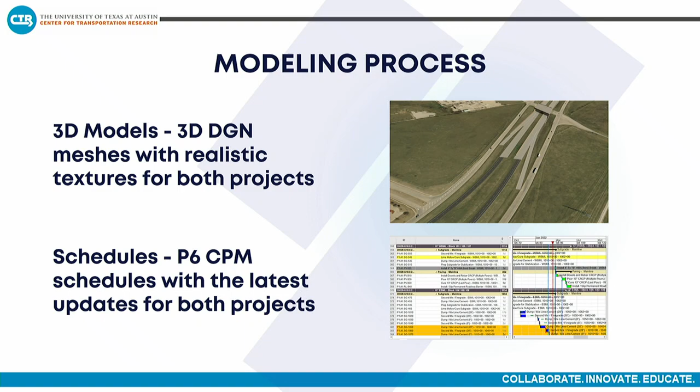Now the modeling process: first we obtain a 3D model, getting horizontal, vertical, and cross sections from the design team, and then we added the texture in 3ds Max.

Then we proceed with the so-called resource generation. That's a way to organize the 3D objects that are imported in order to generate groups that will be assigned to different tasks in the next step.

So for the schedule import, we imported from P6, and we set the scenarios because we obtained two different schedules that belong to two different updates. And we perform the task assignment, that is the match between the 3D objects that belong to the resource and the actual activities.

And then for the 4D modeling, we perform a little bit of animation in just a piece of equipment and some parts of the project, like objects, beams, slabs, in order to show a construction sequence. I'm going to show a video about that next.

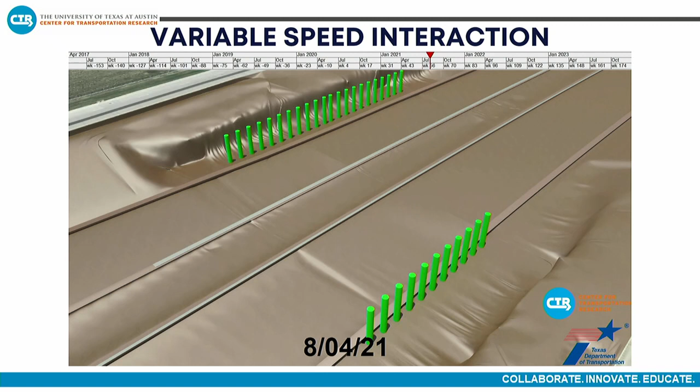So this is the first animation we obtained. That's a variable speed interaction that allows us to watch the construction sequence. It includes a detailed bridge construction sequence. We use different speed animations in order to show detailed activities such as beam placement, retaining walls, bridge construction, and also road construction.

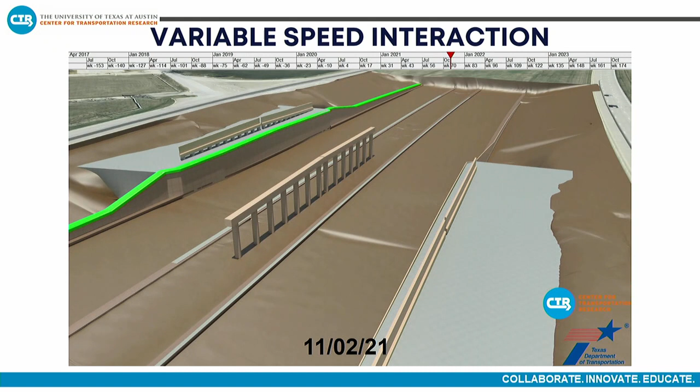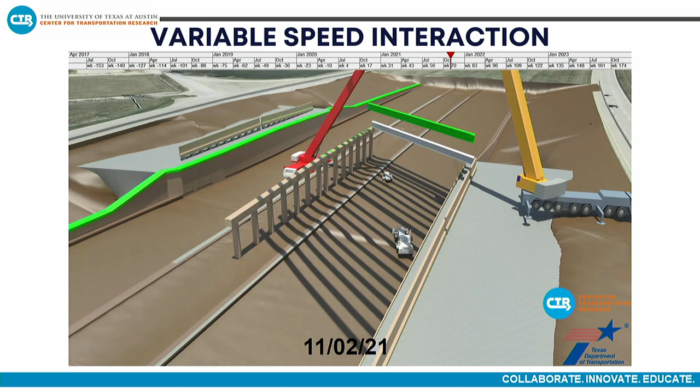All those components have detailed textures and added surroundings. So we were able to add some filling material behind the retaining walls, and also we were able to animate cranes and show a little bit of detailed construction in the middle of a big project construction.

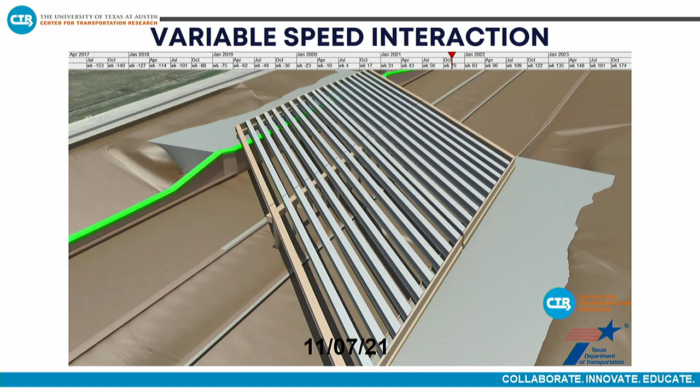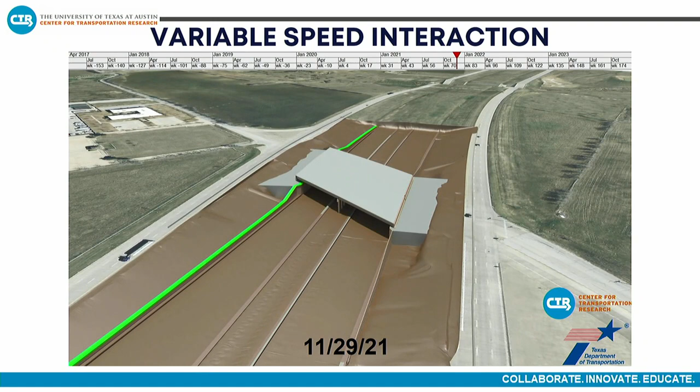We were able to switch between cameras, trying to show the pieces that are being built on screen. Now we are going to notice the difference between this animation and the next one that I'm going to show now.

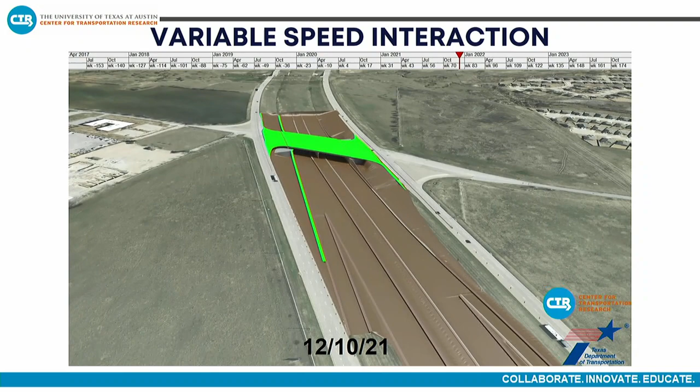So yeah, well, you can see that after the bridge is finished, then the road construction continues, and you can spot several layers, like the construction sequence for both connectors. NTE 3C is on the bottom, and the SH-170 part is on the top.

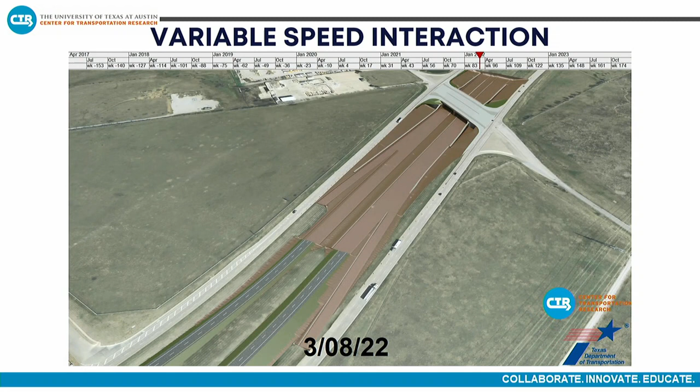Now it's pavement layers, and finally the concrete pouring for the pavement.

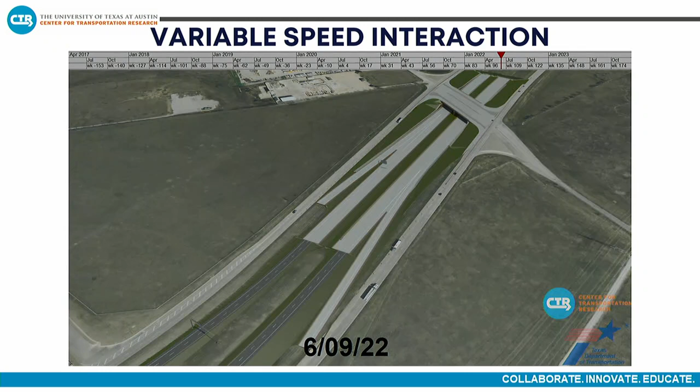So that's the final frame for this model. And this is just a general 4D model that shows the sequence, and we included temporary roadblocks and safety components in order to add more context to the animation.

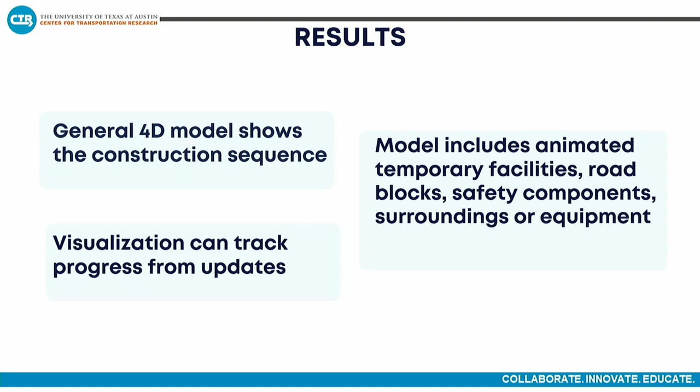Now this is the second interaction we exported, rendered. This is a dual view interaction. In this video, we can monitor different views of the same project. So we can follow SH170 activities at the right side of the screen and NTE3C activities at the left side. So both are running the same schedule.

Road projects can have a long footprint. So sometimes if you use a single camera, then you can't spot what's going on at the other side of the project. So you can have this kind of multi-camera, multi-view running the schedule at the same time. And this was exported from Synchro 4D at the same time. We didn't add different cameras like in a video editor or a different program. It's just a direct render.

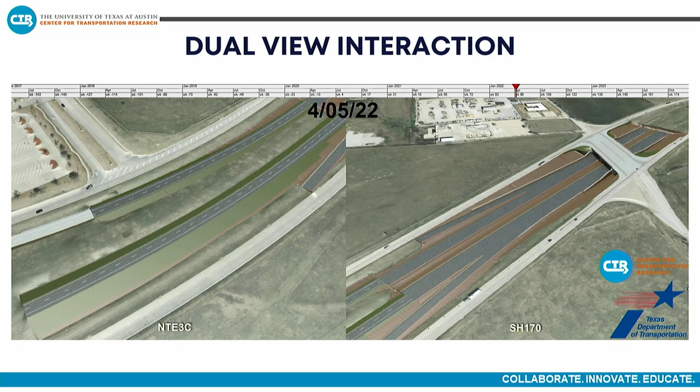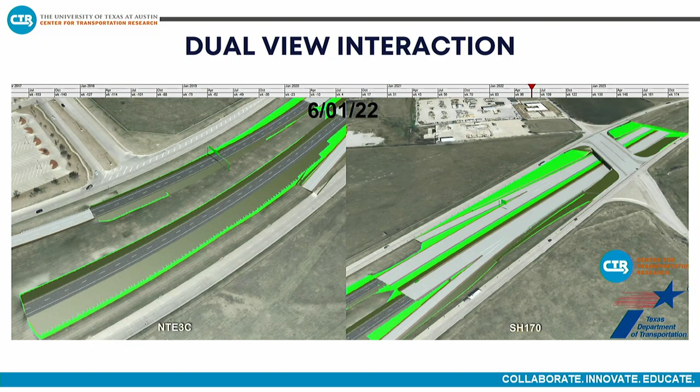To recap, animations can focus in different parts of the project and run the schedule at the same time. You can get detailed visuals for specific parts of the project. Sometimes there's the road, the big road, but there are certain pieces of infrastructure in the middle that you can put some kind of attention on and watch them being built at the same time.

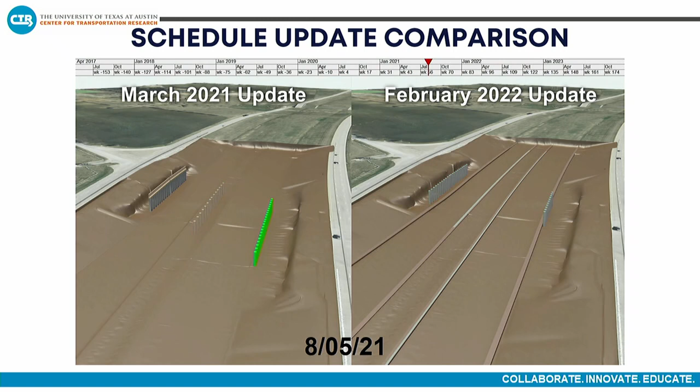And then finally, the third animation, that's schedule update comparison. So we are running two schedules at the same time in the program in order to be able to spot delayed activities and when do they start. The important thing about this is that we can spot changes between the schedules visually.

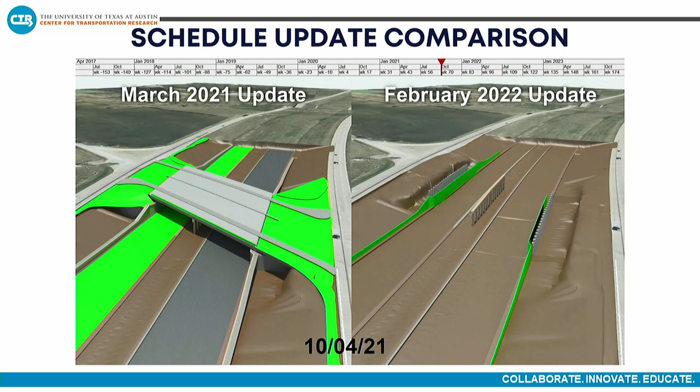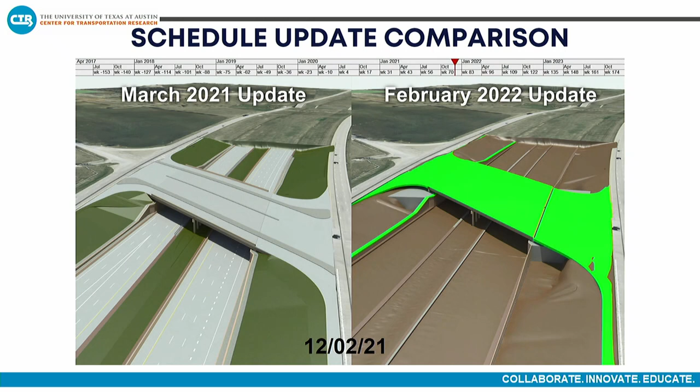So we can notice that on the left side, like bridges, it's been built, but in the next update, those activities are delayed. We can spot too that the construction sequence, there are changes in the construction sequence, especially in the road construction sequence. So that could be spotted visually too, instead of trying to read a complex schedule. Sometimes you can spot that visually.

That makes it easier for the management team. Or sometimes you have too many activities, like more than 1,000 activities, and then you can run a program in order to spot which changes have been done to the schedule in the next update. But because there are too many activities, it's hard to know if that will impact the construction sequence in a certain way. So this could be a help to the project management team, to spot those activities.

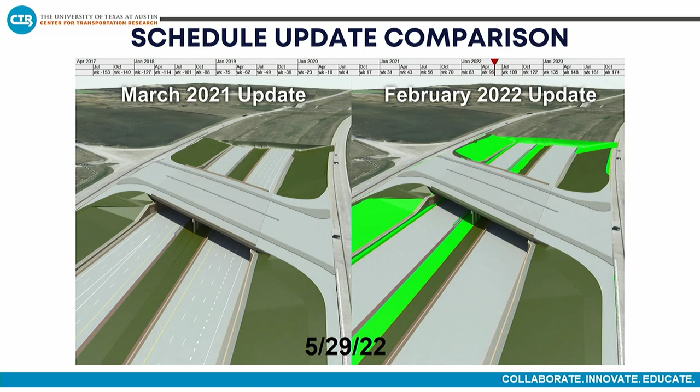So this is just a recap. But the important part is that users can spot earlier started and delayed activities visually. I'm trying to be a visual help while comparing schedules.

So this is just a small feature compilation. You can get construction sequence, multi-view, schedule updates, a variable timeline. Sometimes there are long activities and really short activities, like the bridge construction takes just near a month, but the whole project is more than a year. So you can change and alter the timeline scale for certain parts that you're interested in or that you want to see.

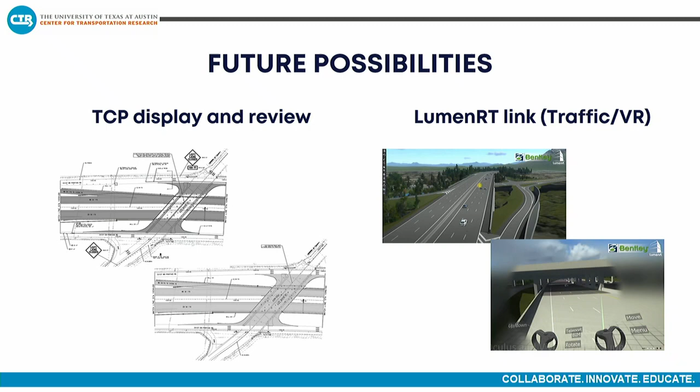Our second plan is to move the 4D models into LumenRT and get a VR interaction with the 4D model using a headset, watching the construction in real scale. So these are the two applications of 4D that we're planning to perform in the future. And that's it. Thank you.

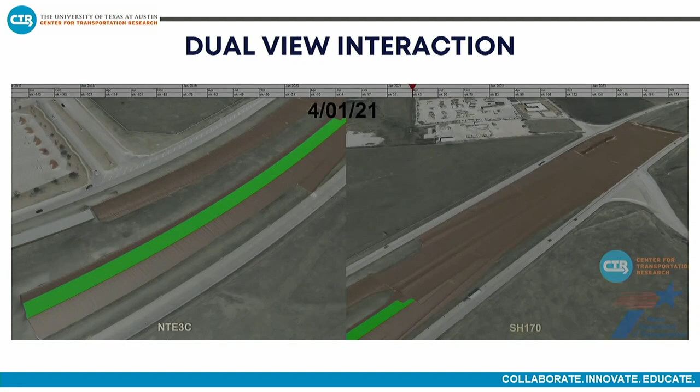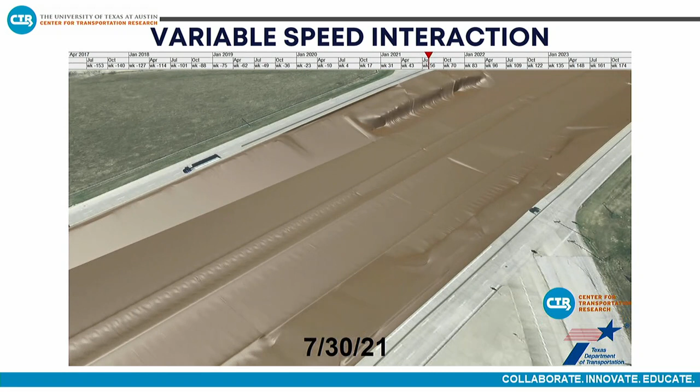Where's this? Yeah, these - we're showing excavated material here, and the surrounding is a terrain mesh that was obtained by photogrammetry. So if we can update that object, sure, we can do it, and then we could show a construction sequence or construction progress using information from the field, direct from the field.

Awesome. We use a game for construction called Need for Speed. If you want to follow up on that, I can see that becoming a game that we could make more interesting, so.

Yeah, I think there would be some work on that. I do think that probably Synchro does have the capabilities to bring those in. My biggest thing about 4D is, how do we show that flow? We're putting out bad information, like things are technically flipped when one's done and one's not, just because we're taking the early start date. But it's interesting, it's good.

Also, do you have any drones? There's a question in the back - I think this could be the last question. Yeah, we'll make this our last question.

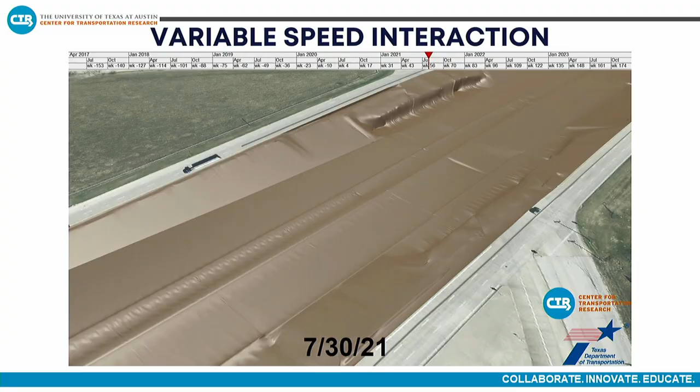All right, well, we're doing the computer switcheroo here.

I see something like this that they're working on, and I can imagine where construction information like that could feed into, a lot of agencies have public-facing project progress dashboards and things like that, and I would think it would feed right into it. Just a thought.

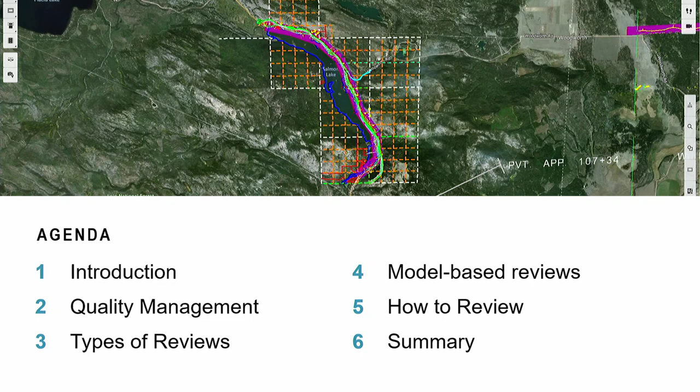So to start off, I have a bunch of things I was going to talk about in the next maybe 35 minutes or so - just going over what is quality management, your QA, QC, going through that, because that's where your design reviews are taking place. We need to have an understanding of that, the different types of reviews we now need to be doing because we have these 3D models, and what does that actually mean to do a model-based review. And some of the tools - if we have time, I can show you some of the Bentley tools, just because that's what I have and I've been using.

So to start off with, for everybody in the room, who do we have here? Do we have anybody who's a designer, who's designed 3D models before? Okay, we got a couple people, awesome, I know you've modeled things. How about, there's a lot of researchers here, right? Handful of research. Anybody else, project managers? Okay, so you've had to review things before, probably on paper. Anybody else? Oh, vendors, right? We have some vendors here maybe? Okay, so we have a nice mesh of people to go through.

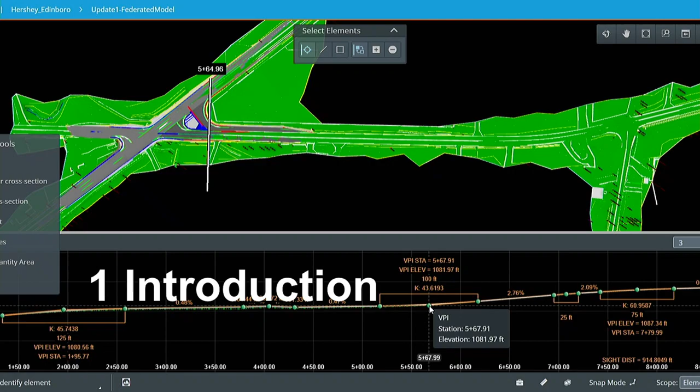So usually when I do this, it's in front of a lot of designers, and they're getting through from - where am I taking this planimetric point of view that I've been doing for many, many years? I've been always making my paper, and now you're forcing me to make these models? Like, okay. And they're like, so we go through, okay, we're gonna make these 3D models because it's gonna save you time later. You're putting all your data together, now you can visualize it, and then you can get your sheets out, you can get your data, your information out, and hand that over to another person. And you're like, that's gonna save time because it's your data exchanges all the way through. And they're like, okay, that's great, that's awesome, I'm gonna save time. And then the project manager comes back and says, how am I gonna check it? Because I haven't opened CAD in 20 years.

So how am I supposed to take a look at that model in the native software? And what does that actually mean? So now that you have all of this data that used to be on the plan sheets, now you're trying to figure out where is that. So what we need to do is, instead of taking PDFs and then modeling them and then putting it into your 3D model, I want to take my data throughout the life cycle of my project. And that's the dream, right?

Someday we'll get there, but so in the beginning, when we're planning, we want to have really good survey. You get the drones, we get our terrain. So we're starting to build up our 3D platform to be able to model on top of. And through that planning, we can do alternative analysis. We can do some cool different tools that's out there - the different products, the software out there to be able to make decisions very quickly and then visualize it rapidly. And that's really great.

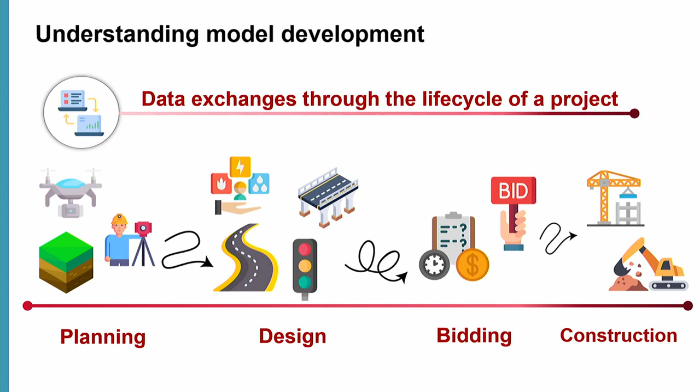Because this talk is all about quality management, how do they know they're getting the quality in that model? How do they know that this has been checked, or that the data or information you're giving me is right? On the plans, I used to do this for years - I used to be able to look at it and go through everything. So we want to understand where our data is coming from, how good that data is, how to verify it, and then how to hand it over so that other people through that life cycle can actually use that data.

So I know there's a handful of different people around here. Does anybody wake up in the middle of the night and think, I can't review this model, or how am I going to do this? Maybe it's an underlying cause, maybe a subconscious nightmare that people have. But that's what's going on - people are trying to figure out how am I going to review this new information that's being handed to me now visually instead of graphically or on paper, just with numbers to analyze.

So is anybody doing any 3D reviews right now at all? Okay, what kind of reviews? Just project ones? Design reviews in ORD? Okay, so you're getting into the native software - you have to have an understanding of OpenRoads. Yes, it's only design in our design QC. We can't review it with partner yet.

So we're starting out, we're still in that native software - that's where you are. But also, just y'all are doing it, you can't share that model, you can't share that open design file with, you said, the client or partner? Correct, yeah, they don't have the capability to do that. Okay, is it capability or is it like an IP risk?

Bentley has some products that are not quite ready for viewing without actually getting the software, but also we have some issues with not being able to use the cloud, which makes it harder to use their software. So we can talk about that too.

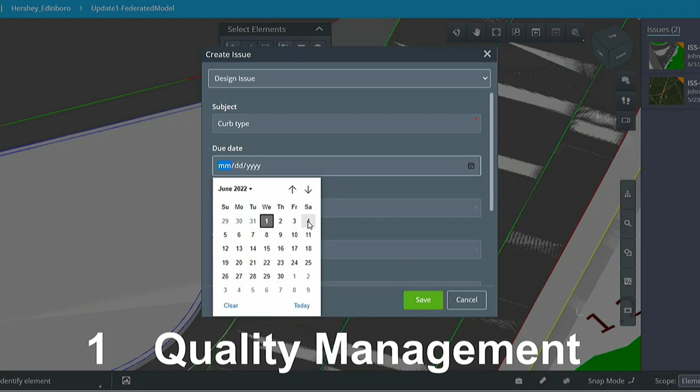So next I'm just going to talk about quality management in and of itself. We're taking a look at quality management - that's your QA and QC put together, but we're going to give it a nice big term. So what does this mean, right? Just as the umbrella, it's the act of overseeing activities and tasks that must be accomplished to maintain a desired level of excellence. That's pretty broad, right? That's a good definition of what we want to do.

But now we need to define that process, right? Now we have these digital deliverables that we're creating, and that's actually becoming the contract deliverable - like I'm handing you over your model and you're going to use this model, and that's what you're getting contractually paid for to use to build. And so now because of that, we now have to have a process and a standard developed to be able to check that.

Because you might not even be getting paper or PDFs. You might be getting some information, but it's for information only. So everything's going to be coming off of these models. And it's the dream, we'll get there. People are doing it now, but for the everyday standard that we want to get to, that's where it's going to be. So today I'm going to focus on the design phase.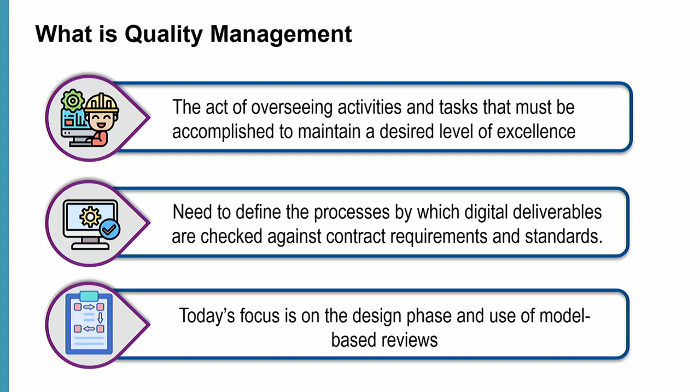I know there's a lot of stuff going on in construction. How do you look at those models? How do you look at it when you're bidding? Today I just want to concentrate on the design side. We're making these models so the BIM use would be for a contractual handover, and that's what we need to start looking at.

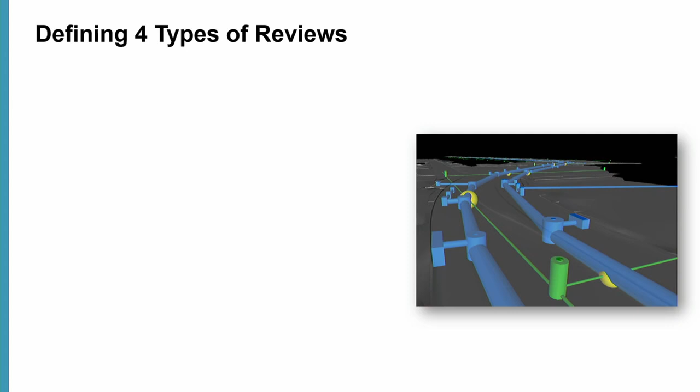So types of reviews. I'm working with PennDOT right now, and we are looking at changing their digital delivery processes so that by 2025, they have an entire process all the way through to be able to design, bid, and construct with a 3D model. So now we're looking at how do we review these models? How do people who have been doing this for 40 years on paper now get that model? And what does that look like?

So we needed to define these different types of reviews for them, because now we also have to define what they are, but what's included in each of these, similar to what our regular reviews have been on paper. So we have design compliance reviews. How does our design comply with our model? And what does that look like?

Then we also look at our model integrity. And that's just the integrity of that model itself in CAD, however that's made. So we want to be able to do that.

We have external stakeholders, because it's not just roads and bridges, but we have stakeholders who might not ever be using these 3D models, such as right-of-way. Right-of-way plans are always, I feel like, going to be PDFs, mostly because the judges in the courthouses still have fax machines. So I don't think they're going to move away from that. So we're still going to have to be able to give our data over somehow and change that into these paper plans for that reason.

So we need to make sure our models are checked for that, along with these pieces of paper. Permits might still be in that 2D sphere, but we're going to be pulling that data from that 3D model. And they actually want to visualize it when they're out in the field. They want to see what their impacts are, but the actual data to be able to actually certify it, I think is still going to be in that 2D area.

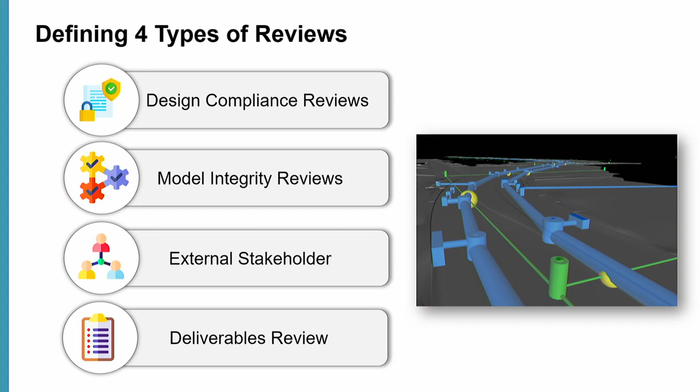So there's a bunch of key factors when we're thinking about these different design reviews. We need to identify who's reviewing it, where they're reviewing it. Is it going to be on a tablet? Is it going to be in the cloud? Is it going to be at home? Are they going to be sitting next to each other? They have to define what are you reviewing. As a specific thing, today I need to review this model, but why? What is my job to do?

And then also, when are you reviewing it? Are you doing these reviews weekly? Is it at the submittal times right before? Is it every day? And that's going to change how your reviews are done and what you're looking for.

But also, who's reviewing it? It used to be just the project manager or the task lead. Well, now we might start needing to have different roles put in place or responsibilities that are now identified. We might be having a model manager, where that's their job is to put these models together, but that's their job to review it too. So we're going to either get new jobs, or you're adding to your own role, or you might be reviewing something that you never got to review before that were on paper plans, especially with these different softwares.

So next I wanted to dig into each of those reviews and explain them a bit more. Now that you're thinking about the who, the what, the where, the when, and the why, what does this mean? So this is what we're kind of defining, playing around with this for the design compliance, and we're making this pretty broad.

When you're doing a design compliance review with these models, the first one is the design criteria. It's the same thing - when I designed my road on paper, I was still using the design manuals and had to make sure it met that criteria. So with your model, you want to make sure it's meeting the criteria. Is my lane width proper? Is that meeting the 45 miles per hour? And then the different road classifications - that's all those calculations. Is my super elevation correct? Is my bridge piers all done and analyzed? So making sure that criteria is checked based off of different guidelines.

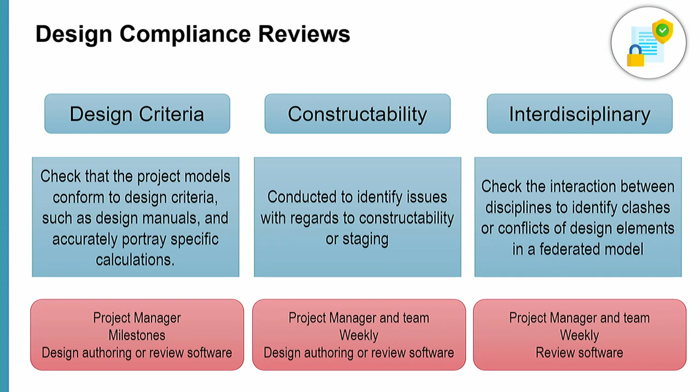Then the interdisciplinary type of review is looking at the clashes and conflicts between those disciplines, which is a little bit different than constructability. It's taking a look at where my utilities are - am I going to be hitting, am I popping out of the middle of the road? Is the bridge going to be too low? So you need to have these clashes checked, and that can either happen in the native software or in some other types of software too. That type of review can happen more often than not - you want to be doing that throughout your design process. And that's usually going to be done through project team interaction.

Then next up is model integrity, and this is where the fun part comes in. So you have this beautiful 3D model, and now you need to check it. That geometric integrity means comparing your model that you've built and spent a lot of time on - because that's what we as modelers love to do - but comparing it to the information you're designing for.

So your typical sections - is my 12-foot lane actually 12 feet? Is my 4-to-1 slope all 4-to-1? Usually you would cut cross sections all the way through and just look at those to verify and check that off. But now with these models, there are going to be tools created that you could run through and automatically see if there's an issue.

If you put these parameters in, that's where the design review software is going to be. We need to automate these processes, because if we want to do these quality reviews more often, I need to automate this. I need to be able to put my parameters in and then push it out.

But I need to check the integrity of my model in and of itself. That's going to happen mostly through the design authoring software or the review software done by the design leads. So your bridge group is going to be doing that, the utilities and drainage group is going to look at theirs, and everybody's going to look at their individual models before they get put together.

So model development might be a new term for a lot of people. It's how you define your different model elements at different stages of the project. In the beginning of a project, it's not going to be 100% modeled. You're going to have a lower level of development, maybe just squares or something very basic, conceptual. Then over time, you're going to add more information and detail into that.

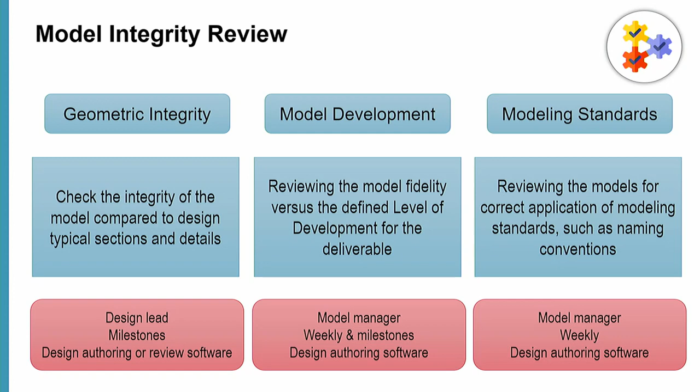Because how many times have you gotten a model and there's a point you're looking at, a break line, and that's called 'break line 0'? That means nothing to me. I want to say edge of pavement, or the center line, or something else. The curb would be nice, I'd like to know what that actually is. So we need to be checking our models for these standards.

Going back over those external stakeholders, if you're looking at a 3D model with external stakeholders, it's probably through a review software. They're not going to be getting into CAD. They don't have the licenses, and that's another issue. Not only the cloud, but how much does this stuff cost? Because it's always about the money and the time.

So we have to be looking at our external stakeholders, especially utility companies, since they're not in the software products like the designers are every day as engineers. So how do we help them still review that information in a way that they can understand it, verify it, and feel like they can actually say this is correct, you can go build this, or you can go dig up my road or my gas line, it's gonna be fine.

And then just those deliverables, reviewing those exported information, if it's a LandXML, someone needs to re-import that just to look at it, make sure it's not a blank file. And you can automate that too.

Is the modeling person a modeling person, or is the PE that's responsible for the design checking it, or just a creator? Is the engineer creating the model, or is someone else creating the model? It could be either, it depends on the project too. What do you see? Both, depending on as we're moving forward, especially on these different projects that are happening.

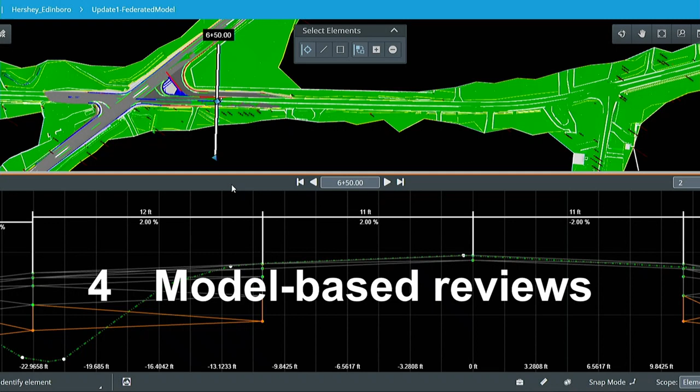And then we could be doing over the shoulder checks. There's different ways to do this. And I think we have to be agile in that too, as your projects are going on, and how do you make sure that these models are reviewed? So it's a new frontier.

So going back, we have to look at our review needs and what our designers are doing. When we take a look at it, our current needs are we need a checklist and we need a set of plans. And if I have a checklist and a set of plans, I can check it, go through and verify that my plan is correct, and then hand that back. That's put in a drawer for the auditing that happens every year, and everybody gets signed off, everybody stamps it, and the check mark who checked, accepted, and changed everything.

But now in the future, what we're looking at is now we need to be able to navigate these 3D models with the 2D digital information too, because there's still going to be tables, there's still going to be reports, and there's still going to be other information that you have. So how are you going to be comparing the two, and what does that look like?

You're also going to have to have people who are familiar with these applications, all this different software that's out there. People are going to have to start learning this and training. So how do you teach someone who's been 40 years on the job, who has only seen plans and hasn't touched a computer or a software application before? What does that training look like? Because that's completely different in and of itself. How often do you have this training? How often do you have to have these conversations?

So we're doing that actually at PennDOT right now. It's difficult, how do we get them to actually open the file and review it? But they're also looking at it like, I only have 2 hours to review this, so how am I supposed to do the same job I used to do in the same amount of time? These are the social and people issues we're looking at too, because it's not just the software or your models, it's also the time. We still need to be just as efficient, we need to get these jobs out, that's how we're getting paid. So we need to have the tools, standards, and checklists together to do all of this.

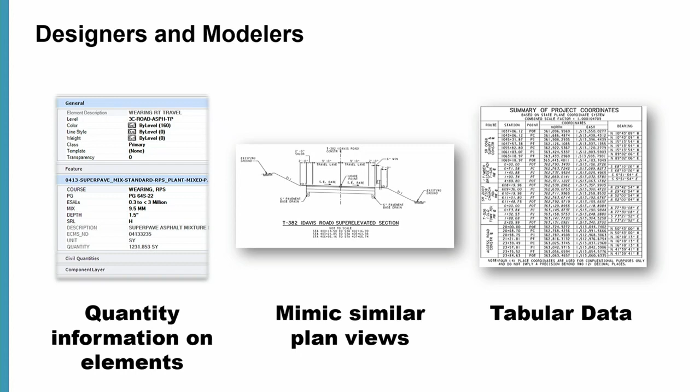But these reports and this tabular data now, it has to be usable. I want to be able to put that data and port it into maybe my machine guidance. So you have to be able to use this data, it can't just be static on a flattened PDF. That's not helping anybody. I want to be able to search, tag, use it in the future - it's gonna be great.

So this is just an example. We still have a couple minutes before, but I'll keep pushing through. The things we need to be looking at now is that export too. It's the dream - you'll be tagging all this information onto your models, and then you're gonna be able to export those pay items and item types and push that towards the bidding system. So that import-export cuts out some of these steps in between. That's going to be important for our designers to start looking at as we move towards these different design reviews.

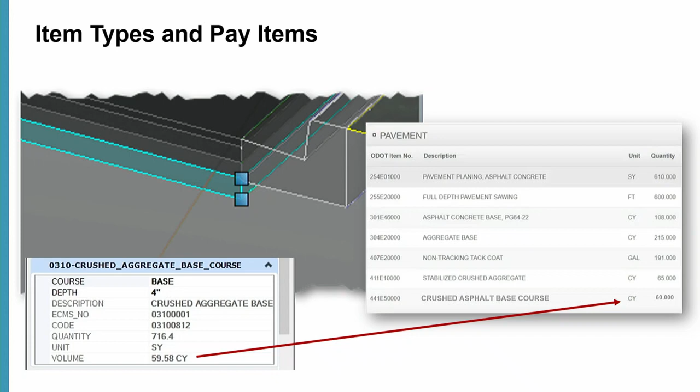I think this is a video.

One of the biggest things too, with our reviewers who are not in these native software packages, they still want those views - just like you had detail views, I want to know where my typical sections are, things you used to see in the plans. How do we now show it to the reviewers? And the one thing we found, I think I should show it, are saved views. In Bentley software, you're going to be able to create these saved views so that when you open that file as a project manager, I can see which ones I want to look at.

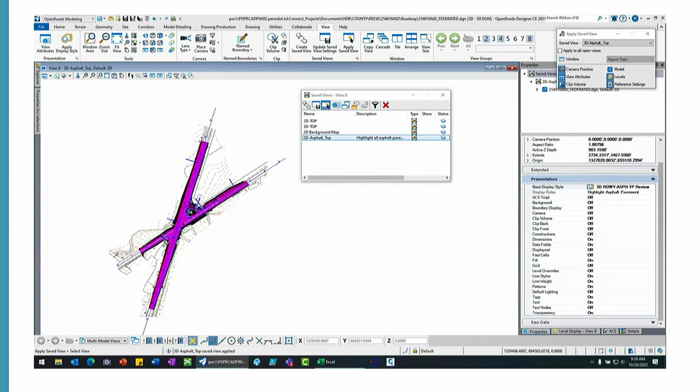I need to check, where's all my concrete? Where are we doing that? I can have a saved view that you immediately click on, so you're not clicking on every button, because that's scary. Project managers never opened a CAD file before. You see all those buttons up there? That's daunting, and you close the project already, right? You're like, I'm done. But having the ability to very quickly open something and look at it with these saved views, that's where we're going. So with these saved views on the DGN files, you're going to be able to port that into the design review software too.

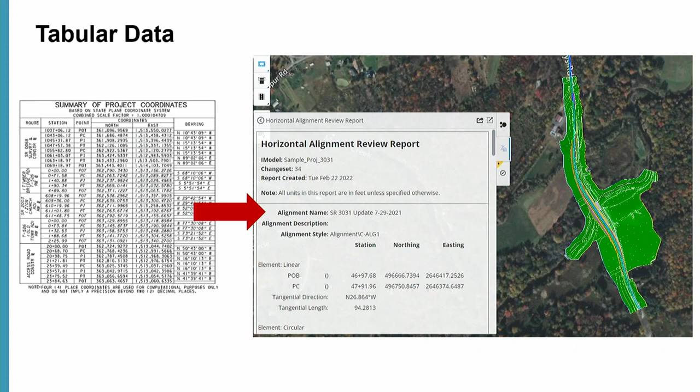So now when you're looking at that tabular data and you want to review it, instead of having a printout or an export, you're going to be able to do this in design review software. Yes, it's in the cloud. But you're going to be able to click on it, and I still want to be able to get that report. So when we're looking at design review software products, we want to find all of this information the same way I did on paper. So going through very quickly, how to review this.

So what is needed for these model reviews? Now we have our models, we have our standards in place, maybe we have this checklist. What do we need to do? The goal is to have real-time collaboration and issue tracking. That's what we're going to need with our 3D models.

Because if you're each looking at the same 3D model, but you're not in the same file, or you each have it on your own desktop, you're all going to make similar comments. It happens all the time on paper plans, right? You come back, and as you know, the intern has to go type them all in. I'm like, wait, they're all the same comment. Yes, I know I misspelled that word. So to avoid that, we need to be in a real-time collaborative and issue tracking place so that we can take a look at that.

For these model reviews, with clash detection and constructability reviews, we're going to need the capability to do that and be able to put in the parameters and check that. We want to be able to interrogate those models to identify information found all over the place. So I want to be able to either run a script or search for something. Where is it in my model? That's what we want our review software to do.

And then I want to be able to extract element data. I need to be able to check quantities. Quantities are the biggest thing, right? At the end of the day, that's what we're looking at. So if we verified it through calculations, I need to be able to verify that in my model too, very easily.

So we've touched upon this really quickly, but where do we review these 3D models? There's going to be a variety of places that we're going to be doing it. It's not a one-stop shop. The different types of reviews we've already covered are all going to happen in different ways. So you can be in your native software, you can be in a model viewer where it's just a free 3D viewer to get some information, or in design review software. That's what's coming out within the industry right now.

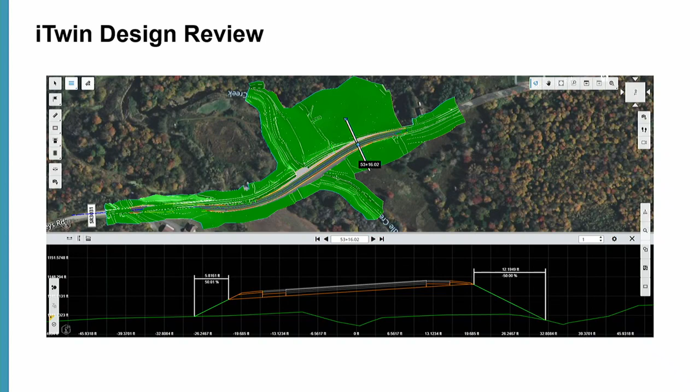So we have our model, we have our information, and you're able to go through very easily. As a reviewer, if you've never been in the CAD software, this looks a lot nicer, right, than that OpenRoads one. It's not as intimidating. And the way that they've made this software, it's very useful.

You have your navigation, certain review tools, reports, and different saved views. All the saved views you made in your DGN files are there now. So a reviewer can come in and say, where's my bridge abutment? Click on it, and it takes you right there in the model. You're able to replicate that similar process you used to do with your sheets when they'd look through for the abutment detail. Now you see the same information there, and you can click on things and interrogate it. That's what the software does.

I have a bunch of videos, but we can go through them later if you want to see them.

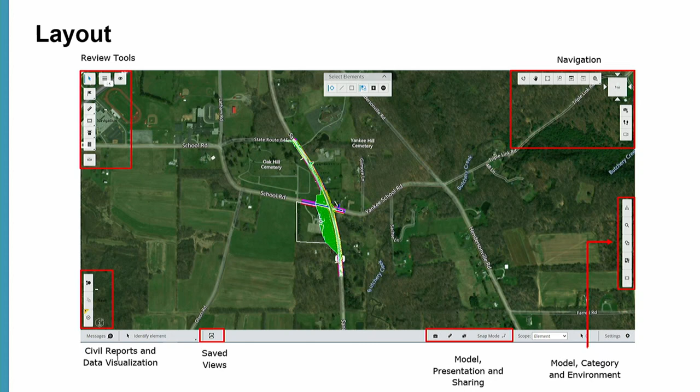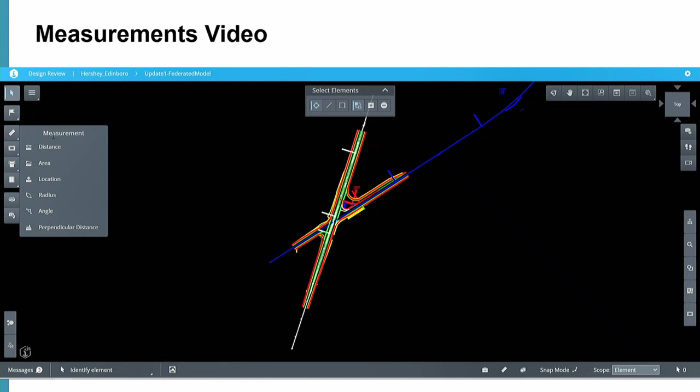As I talk, you have this information, you can turn things on and off, put in a 30% model, keep adding to these models over time, and look through the different tools that are there.

One of the things with working with Bentley is I can sit there and say, I really need super elevation. Where's my super elevation? Give me tools to do this. As we go through as an industry, we need to start telling our vendors, I used to be able to find this information. Give me a way to do that now.

How do I get those reports? How do I get those quantities? How do I interrogate something and quantify it? So we need to keep building up these tools and making sure that they work, because that's helpful.

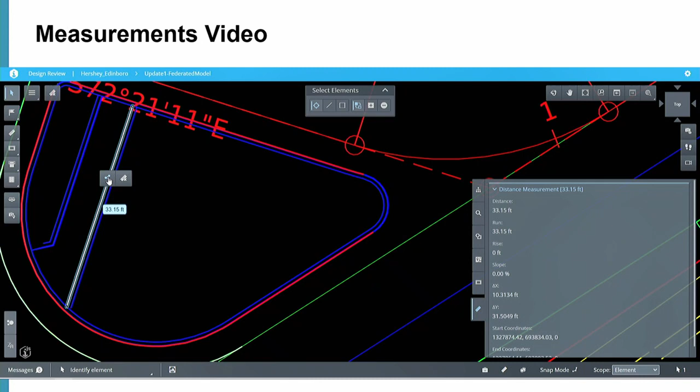We have a bunch of videos, and the way we're doing this with PennDOT is we've created these videos so people can get trained, and then go back to them later. Especially being in this virtual world and doing things remotely, it's about how we train our people, train those reviewers to do these things. We're finding it's a lot of talking, a lot of presentations, just getting out there and teaching people. We're actually making sandboxes once we get that cloud usage, maybe.

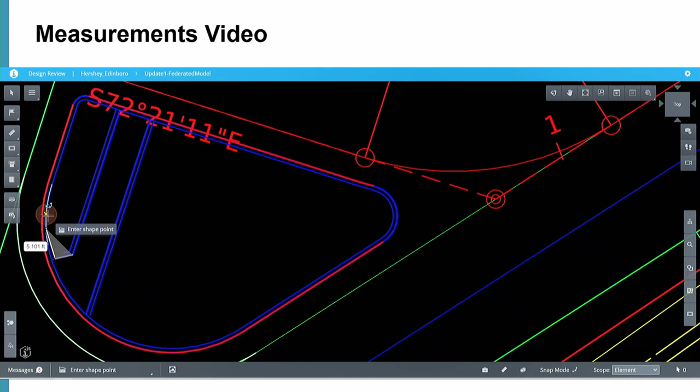I think we got it, so they're able to go in there and play around before they actually get a project to review, because you need to first see it. And then you need to actually get into something and play around before you feel comfortable enough to do it on a project.

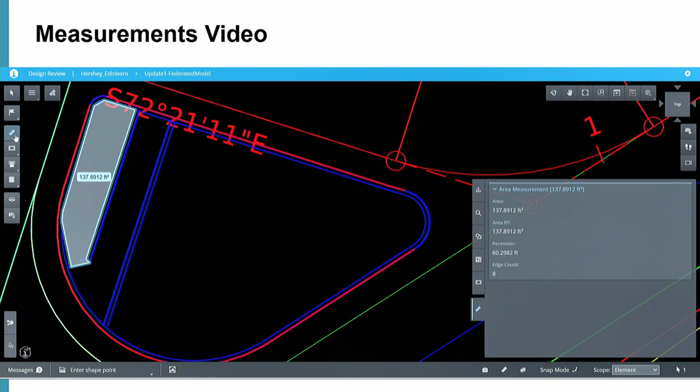So training is huge, and how do you train people? You're going to be doing this in different ways. If we had more time, I'd talk about social sustainability and how that turns into the equity we need for training. There's a lot going on with these design reviews, and it's a lot to figure out, not only for a project, but for an agency to figure out what they want to check off.

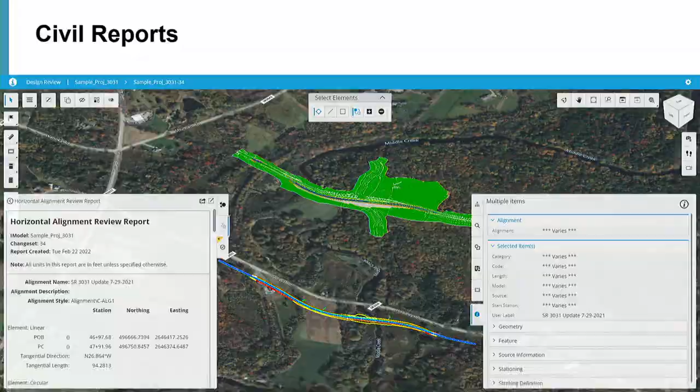So those were just some fun videos, and I think I have a summary video. Oh yes, in design review you can also assign issues, and that's where the collaborative piece comes in. Everybody gets into the same project and is able to look around and toggle things, and that can all be tied back if it works correctly.

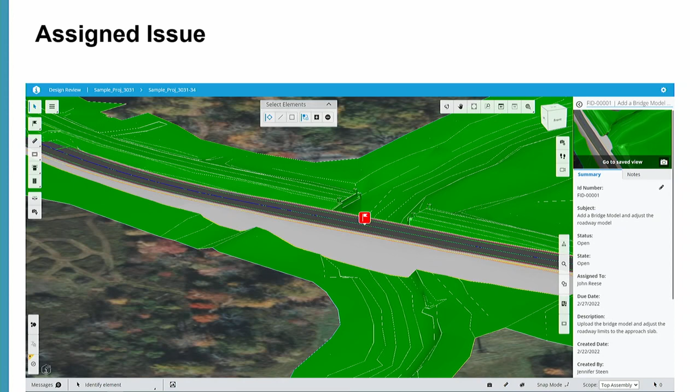So just quickly in summary, we need to be defining what our collaborative design reviews look like and what that means to everybody in this room. It's going to mean something different to each of them. We need to be defining responsible parties and telling them, you are in charge of this review, so you need this training, you need to be doing this. This is now your responsibility, your job, your role, because that is going to change.

At the core of any of this stuff, any of the visualization things we see, we need to be helping our designers model better and model clean, modeling what they need to be. That's the biggest takeaway I've always talked about, for how many times have I been here, three years? So it's creating that model setup, and then you're going to be able to review it at some point once you make it. Yes, thank you. All right.